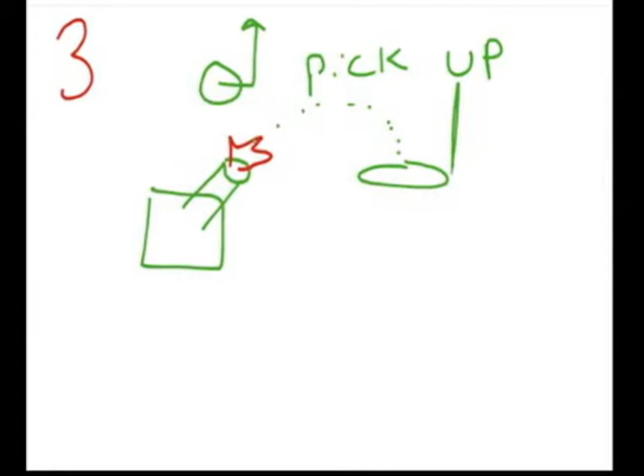This year, we created 3 main goals for our robot. First, we wanted to pick up the basketball-like game pieces. Secondly, we wanted to take these pieces and score them by shooting them into a basketball hoop. And finally, the hardest part of all, we wanted to balance 3 robots on a ramp that was mathematically created only to balance 2.

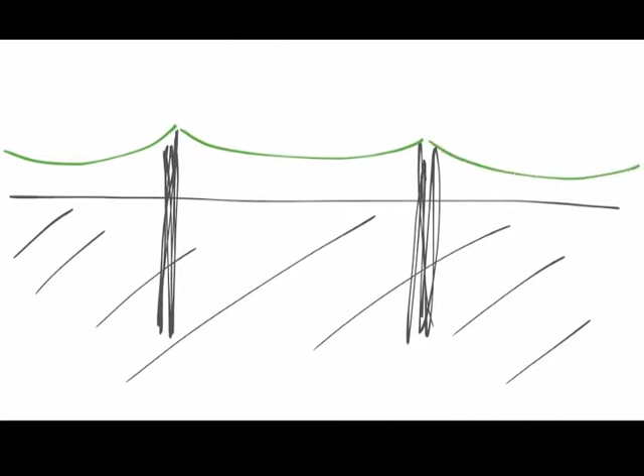In order to innovate these ideas, we kicked off the build season with the polar bear story. The polar bear story is a unique story about engineers who lived in Alaska and were tasked with the problem of eliminating snow on top of high-tension wires. The snow would build up, and then the wires would fall over.

These engineers deliberated for hours and actually found that the more crazy ideas were, the better the springboards were for more new ideas. What if we got polar bears to knock the snow off? Well, how are we going to do that? We could put meat up there? It's not like we can just drop the food on top of the power lines with a helicopter. Yes, we can, that's it. Do you think that the vibrations from the helicopter will just knock all the snow off the lines?

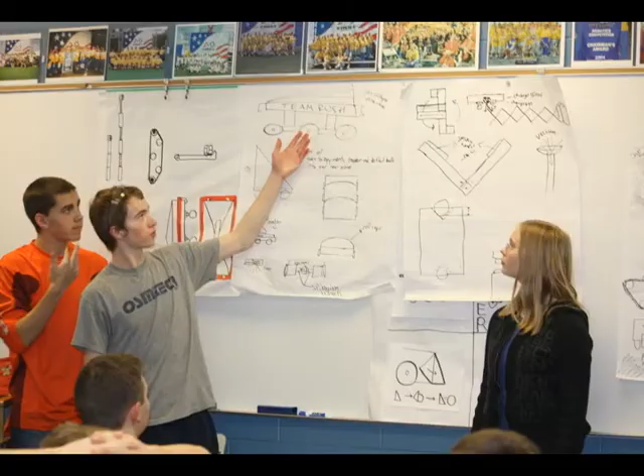That's a great idea! The polar bear story is told each year at the beginning of the build season. The team comes together to watch and learn the new game, and then we play the game to help us start the brainstorming process. We include everybody, especially the non-technical students and mentors, because their ideas are outside our box.

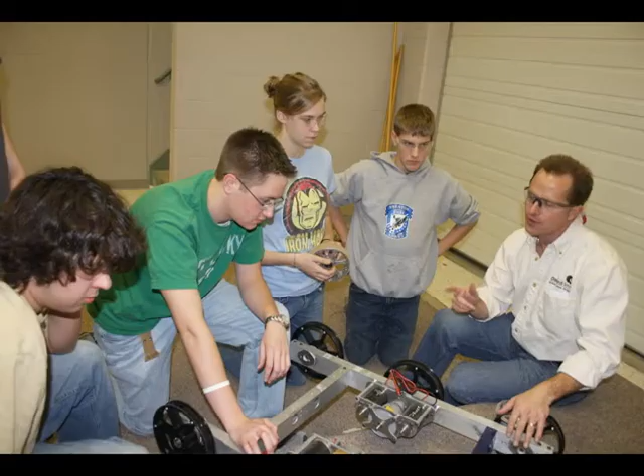We spend 1 week on multiple design ideas, brainstorming, drawing, talking, and then we draw some more. Then, the ideas are handed out to each sub-team where we become responsible for fulfilling the requirements that the team has set forth for us.

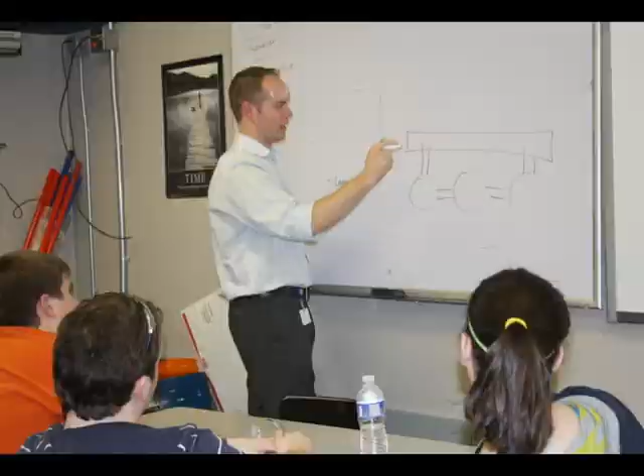This year, as a senior student captain, I was assigned to the chassis team. Chassis was a student-led sub-team responsible for design and fabrication of the chassis, the bridge actuation device, and the bridge balancing mechanism. Our big design innovation was the bridge actuation device.

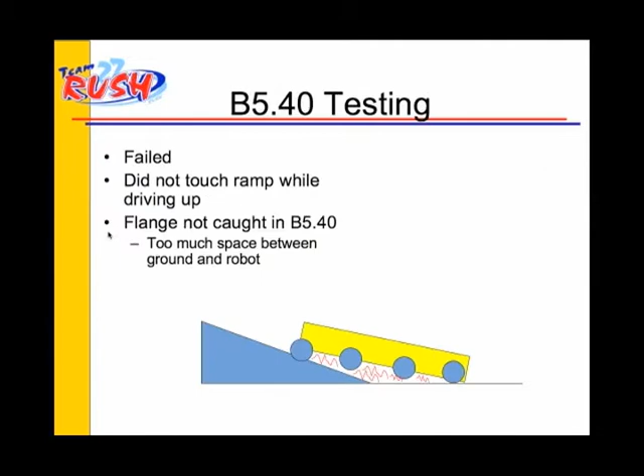We used team design reviews to discuss our main ideas from brainstorming with the team to get direction on where the team thought that we should be moving as a group. As part of the design process, we use design reviews to teach the rest of the team what our sub-team has been able to accomplish during the week, as well as give a detailed explanation about what our roadblocks were last week and what our goals are for next week.

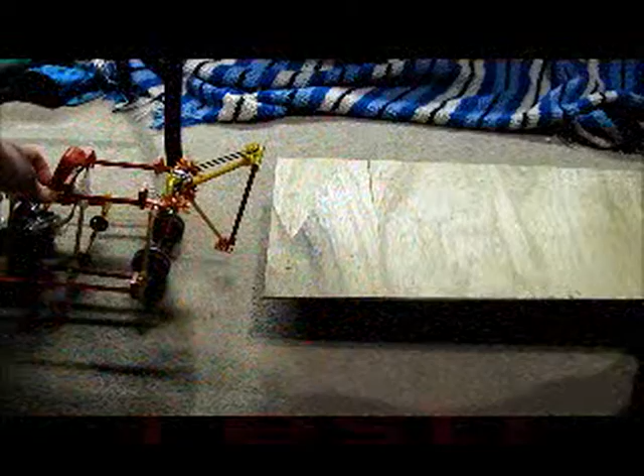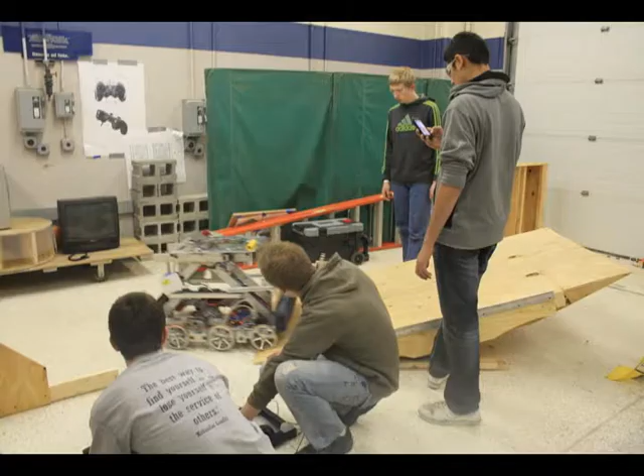We started our prototyping by building a small-scale K'NEX version. This helped us avoid wasting materials and gave us a product to hold in our hand and look at. Then, we bolted together a large-scale test model to an old robot so we can continue testing and provide ourselves with a visual for our physics calculations. Using physics, we calculated the optimal contact angle between the robot and the ramp.

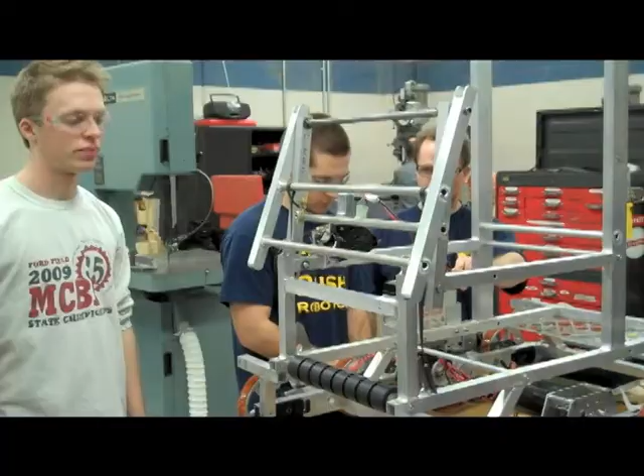Moving to the real product now, we took to the mill. We're broaching the lightening holes and machining the parts for assembly. Once it was all fabricated, we attached it to the robot and began testing it yet again. Immediately, we noticed design flaws like hard stops and maximum size violations that we thought were resolved in the design.

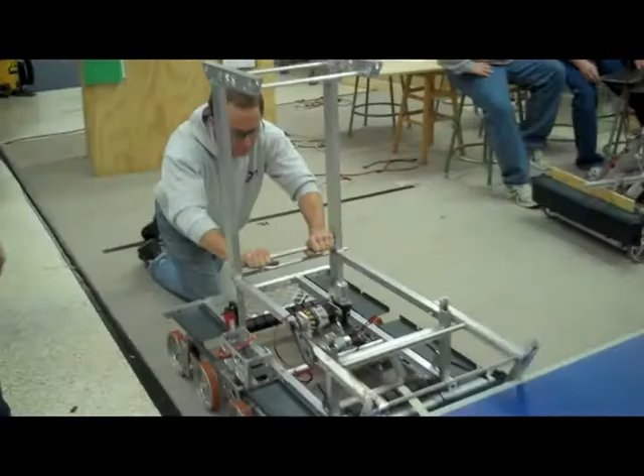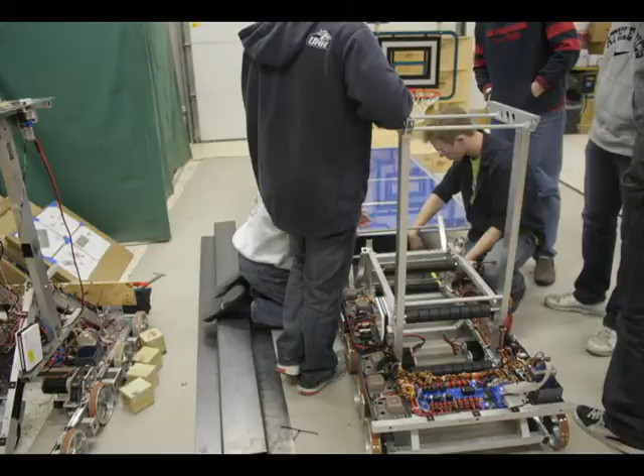So again, we went back to the brainstorming board, innovating solutions to the inherent problem that we created. Then it all became clear. Just one simple strain would change the whole system, evolving the actuator from a 4-bar linkage to a swinging club that would allow for the problem to be resolved.

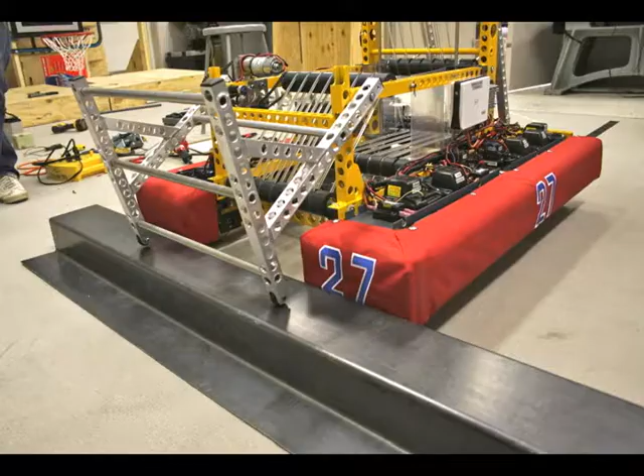Plus, it looked sweet. In the end, we now have a wedge that deploys via robot, swinging out in 1.7 seconds, and allowing us to cross the bridge in under 4.

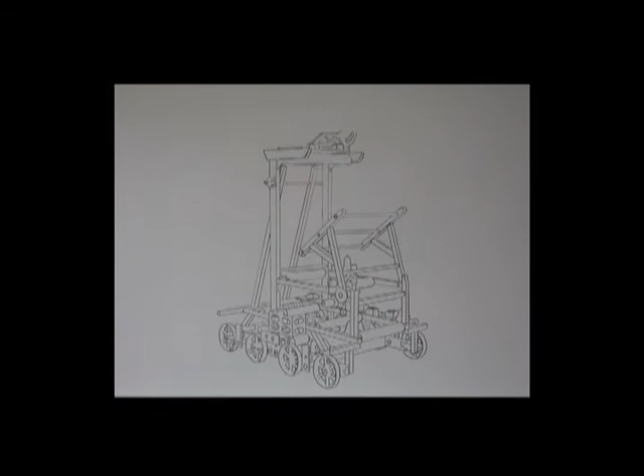From the annual design challenge, the game, to developing concepts, brainstorming, and the polar bear story, teamwork is built in parallel with the robot. Rush yearly creates a detailed machine which fits a square peg into a round hole, with developing details and modifications when needed. The entire team is needed, and it couldn't be done without everyone.

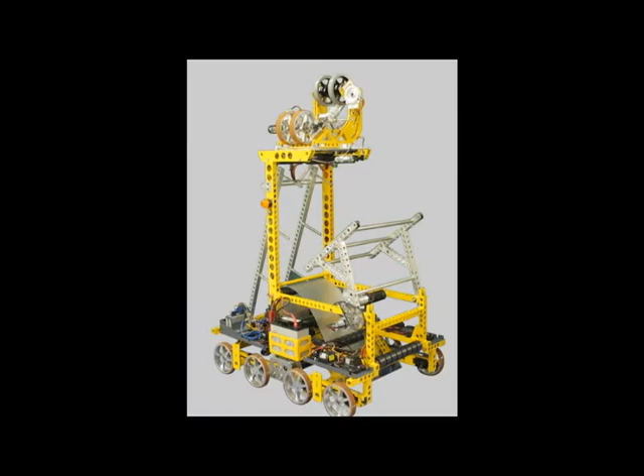Rush. Respect, unity, spirit, and heart. I've been surrounded by FIRST since I was 2 years old, and have grown up with teamwork, innovation, creativity, and robotics intertwined with my personality. Without FIRST, I would not be who I am today. Whether I'm 17 or 2 years old, I still believe that it's 2 thumbs up for polar bears and FIRST.